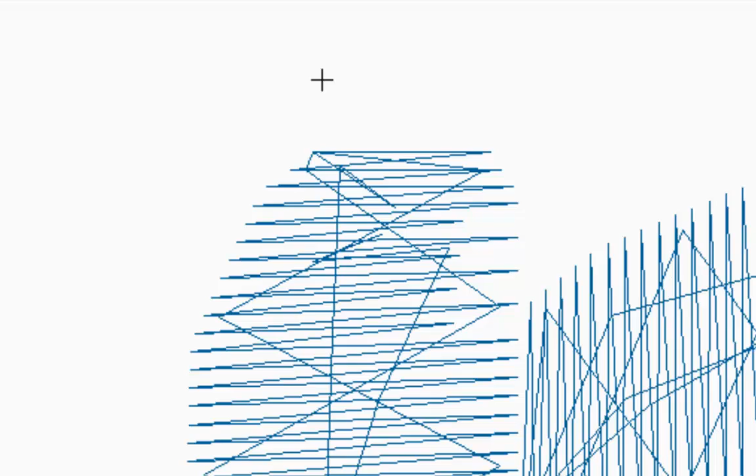Okay, and what this is, everywhere that you click is going to be a needle drop. And what we want is—so I've clicked on it, my cursor becomes a little crosshair. I'm just going to go right at the end here and just go boom, boom, boom, boom, boom, boom, boom, making a zigzag. It doesn't have to be perfectly even—nobody is even going to see this stitch really.

Okay, this is going to be teeny, tiny, but it's going to cut out with these little perforations. It's going to cut out my puffy foam. Now you're going to end up with jump stitches if you do this, okay, and it's fine—it's just the way that it is when you're digitizing with the manual tool.

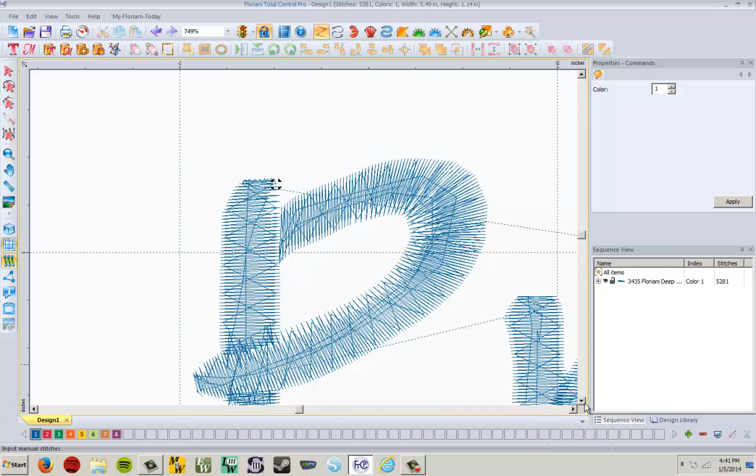So we want to look for all the other ends that are like this—there's one down here. So this part of it is time consuming, but if you want it to look as good as it can, this is what you have to do. Boom, boom, boom, boom, boom, boom, boom, boom, boom, boom—okay, just like that, that's all it takes.

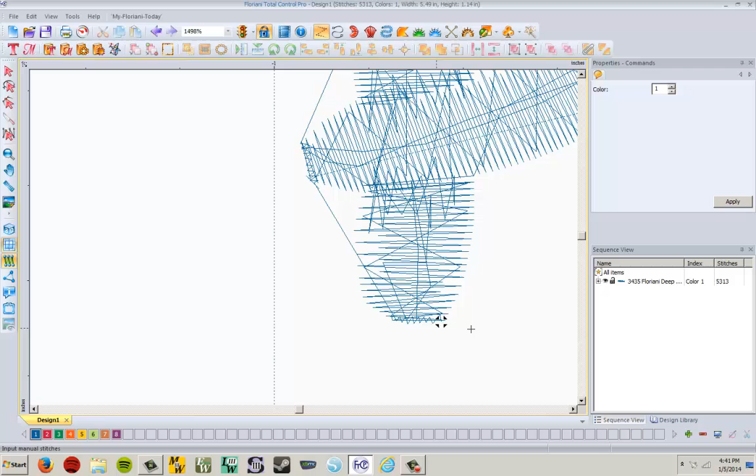You want to look for any areas that aren't getting cut, anything that's got like a flat line here. Boom, boom, boom, boom, boom, boom, boom, boom, boom, boom. Okay? And that's going to cut out my puffy foam for me. So anywhere that you see that, that's what you're going to do.

Now here, this is going to cut out just fine—this P, this part of the P is fine, I don't need to do that. But up here, the top of my U, that's going to need it.

Up, down, up, down, up, down, up, down, up, down. Doesn't have to be perfect—like I said, nobody's really going to see this unless they look really close.

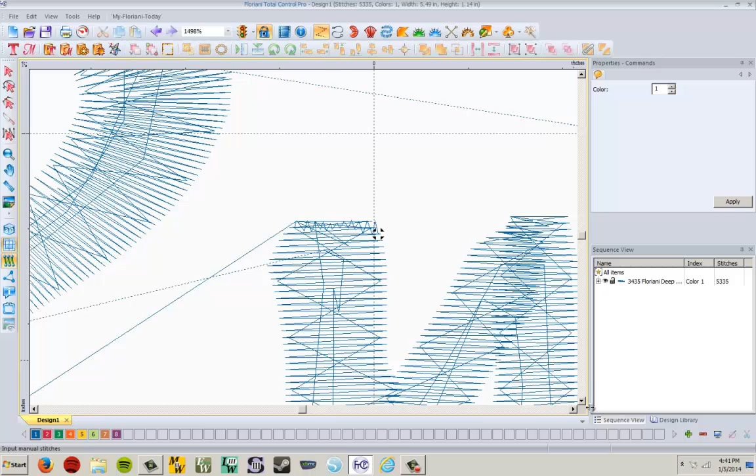And if somebody comes up and looks really close at your stuff, tell them to buzz off.

Just like that. Oh, I really messed up that one. It looks terrible. Alright, I can't do it. It wouldn't really make a big difference, but I just can't. I can't be doing that. Alright, so we're just keeping on.

And so on and so forth. So you would do that here, and here, and here, and here. All around, anywhere that there's this flat edge, you would be going and putting those stitches in, and that's going to make it so that it cuts out evenly.

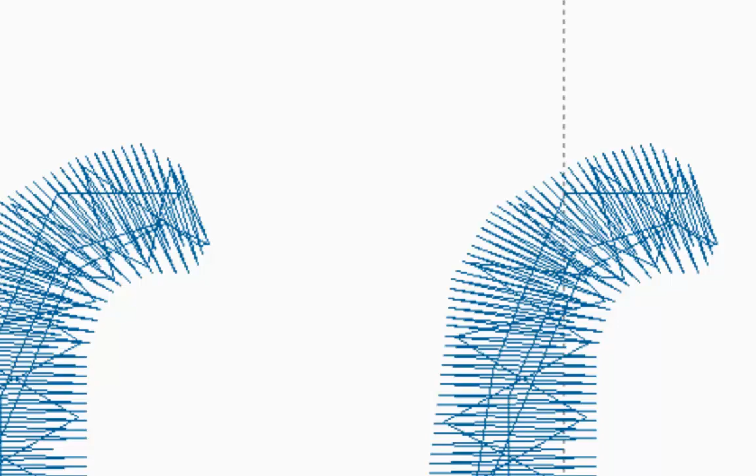Now, I promised you another way to do it, and there is. So if you go to your Steil path up here, left click on Steil, or it could be Style, I don't know how to pronounce that word, but it's this one here. It looks like a fuzzy worm, and if you hover your mouse over it, S-T-E-I-L, Steil, Style.

Nobody ever told me the right way to say that. And you're just going to click and drag - or not click and drag. You left click once, then left click again where you want it to stop, then right click, and that puts it in. But look, it's enormous. This is way, way, way too wide.

We need to set this width down to something ridiculously small, like 0.3. It won't even let me do it that narrow. Oh wait, here we go. I didn't have it selected. Let's see. 0.3, Apply. There we go.

But see, there you have to go in and change settings, because the stitch length isn't long enough, so we'd have to change the density of it. Say, change the Steil density to 0.2, and apply. Yeah, I mean, it's just so much more work to do it that way, even though it's using an automatic tool. And you can see that way it does get that perfect line in there.

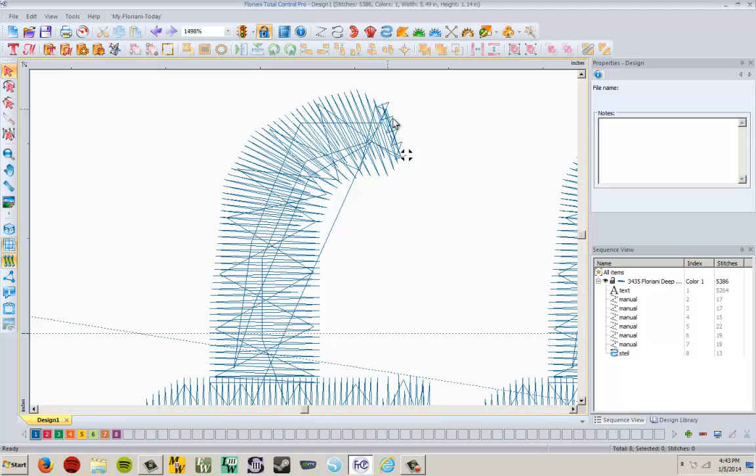Let's look at it in 3D. Yeah, see, that's exactly what we're looking for. But you can really just draw this in. I could draw this exact same thing in using my manual tool by clicking here and here and here and here, and it would be the same thing. So it's just faster to use the manual tool, I think.

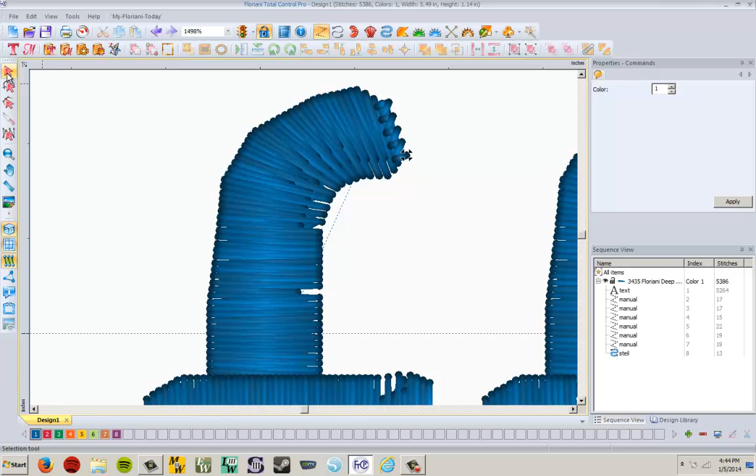So that is what you have to do to make decent looking Puffy Foam letters. Now, what if I didn't want to use the letters that are built into the program? I want to use some TrueType letters instead, ones that I have on my computer.

Well, you can do that, and there's a few ways you can do it. The easiest way would be to take the letters and make them outlines - so instead of having filled in letters, to have them be an outline. And the reason for that is when you bring in a TrueType font, it comes in as an outline. Let me show you what I mean by that.

I just deleted this, I highlighted it and hit the delete key. I'm going to now go up to File and Import TT Text. That's how you get to your TrueType fonts. So I left click on that and I just go and pick what font I want.

I'm going to do something with big outlines, like Bauhaus here. Type in what I want to say and hit OK. So this is a TrueType font that's built into my computer, and it's just an outline. So I can make it as big or as small as I want. It's just an outline right now.

It's not stitches, it's not anything. It's just outlines that I can then go and change into a stitch type. Now, if I wanted to change these into a satin stitch, I would have to go in and manually tell it what stitch direction to make it the whole way, if I want it to be a satin fill anyway, like those other letters were. And that's a bit more complicated than I really wanted to get into in this video.

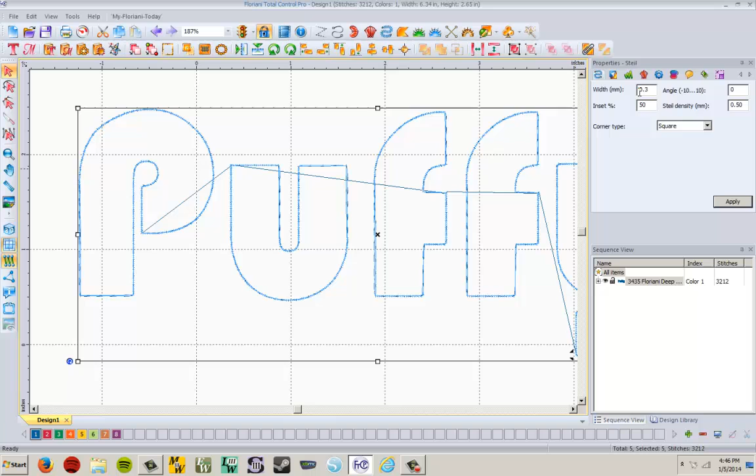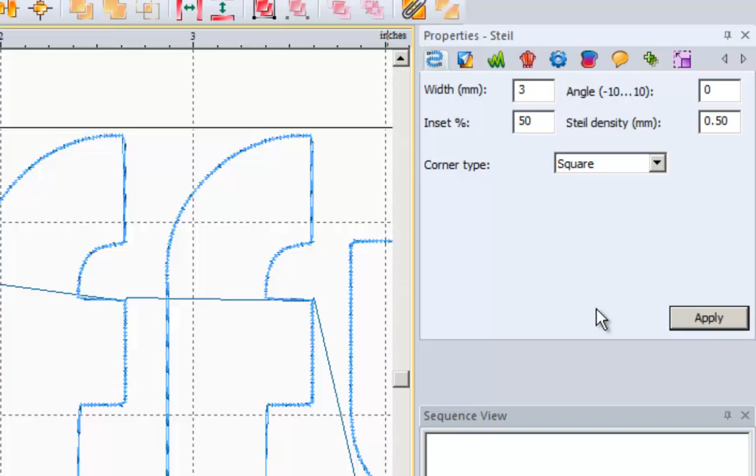It remembers my properties from before, like that I wanted my stitch paths to be 7.3 millimeters wide, which is wider than we need. Yours is probably not gonna be that, but we want our stitch width to be around 3 millimeters, so hit apply. Now we need our stitch density, we're going to change that to 0.2. Hit apply. There we go, nice and dense.

Now, what other changes do we need to make? The underlay. If you said underlay, you were right. So we go to the underlay tab, the next one over, and we're going to change it from parallel to zigzag. We're going to change our stitch length to 1.8, leave everything else the same, and hit apply.

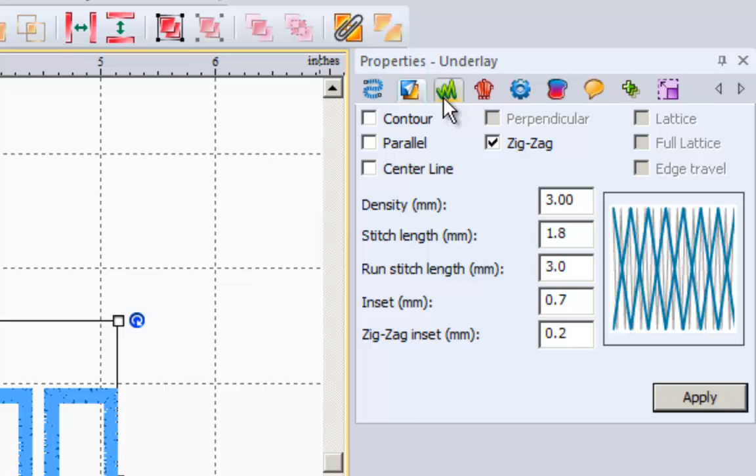Now, the other thing I didn't really talk about is that you can change your pull compensation a little bit for Puffy Foam too. I found it didn't really seem to make much difference. I was reading a tutorial before making this video that said to change your pull compensation, but I didn't find any difference when sewing stuff out. Still, if you want, you can change your pull compensation here. Change it to absolute, then change the absolute number to like 0.3, and hit apply. That makes your stitches a little wider, which I guess I could see why it would help, but I didn't notice any difference personally when sewing them out.

So anyway, that's it, we can save it. Just go to File, Save As, and save it to a flash drive. Make sure you save it as a PES file, unless you use some other weird sewing machine - Janome would be a JEF, Brother would also be PES, and Husqvarna would be VP3, Viking VP3. Whatever format your machine uses, save it in that. Then you're good to go. How this works is you put the Puffy Foam down, sew it out, and then rip it off. That's it, couldn't be easier.